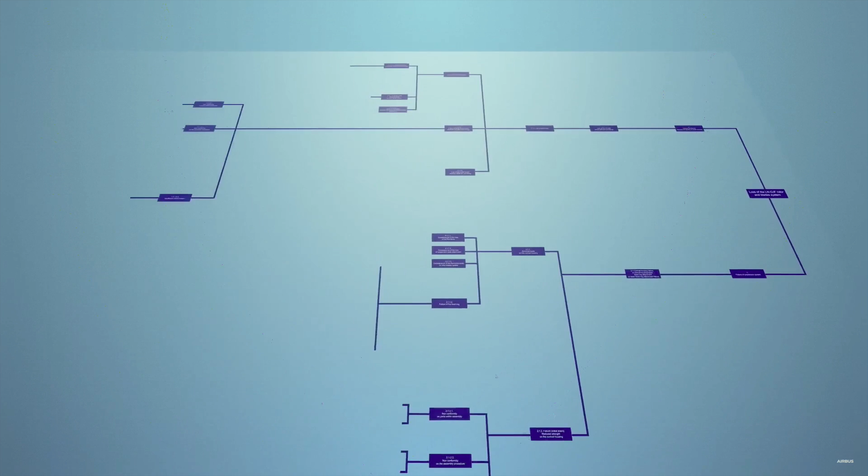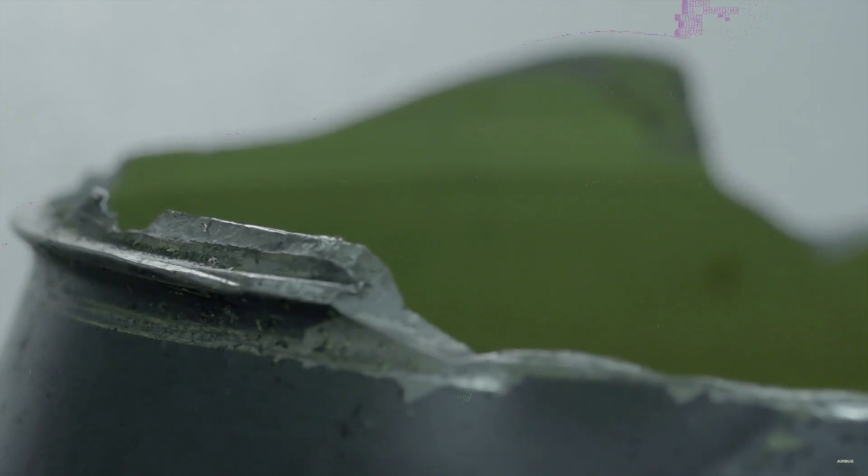Initial observations revealed that the rotor had separated from the cabin. In response, we began by listing all the possible scenarios that could have led to such an outcome, even the most improbable ones. One by one, every branch on the fault tree analysis was put to the test in order to confirm or rule out each hypothesis. We drew on all the information gathered by the investigators on site to piece together exactly what happened. Each and every detail was taken into consideration. We also used complex numerical models simulating different failure modes, comparing them with observations of the actual parts.

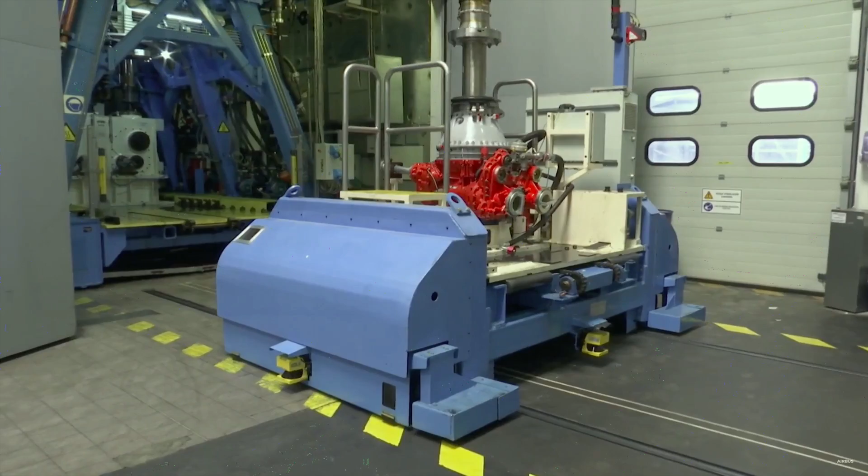In the meantime, we considered and examined a 2009 Super Puma accident that bore similarities. Finally, we carried out about 2,000 hours of testing in dozens of different tests, the aim being to reproduce the failure scenarios envisioned and to identify which one actually occurred. In total, more than 370 people were called upon during the course of a year.

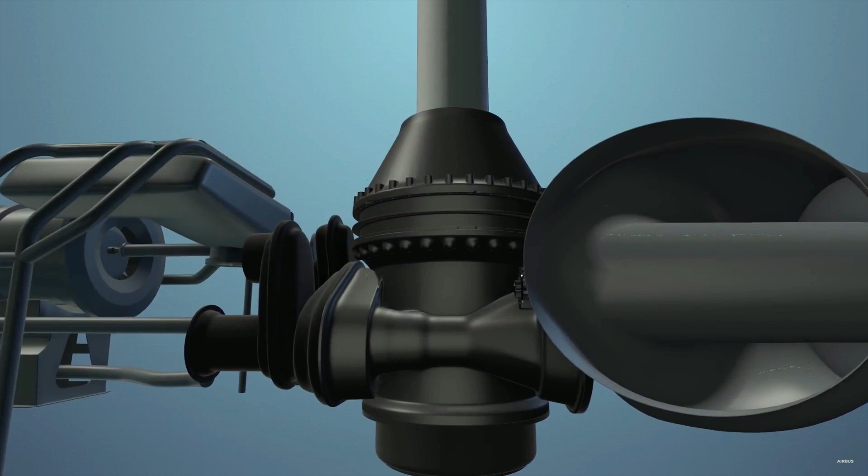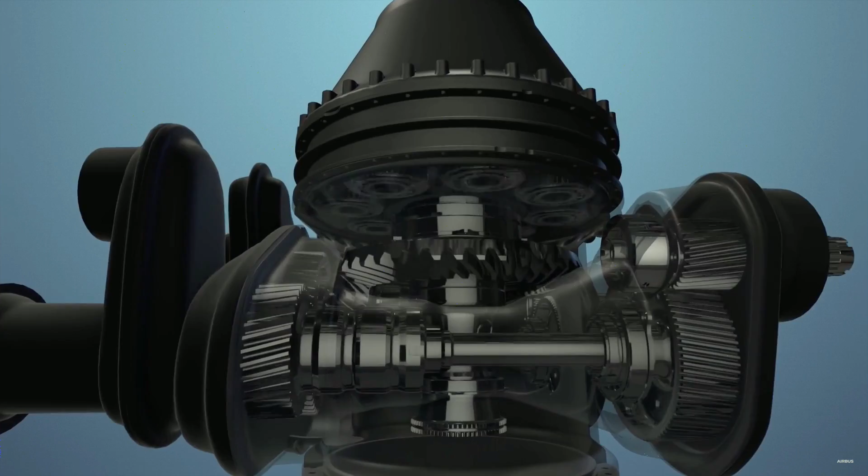Throughout the official investigation led by the Norwegian Accident Investigation Board and supported by Airbus Helicopters, we were able to identify precisely the sequence of events. The origin was traced back to the inside of the main gearbox, a key mechanism in the aircraft, as it transmits power from the engines to the rotors, while reducing rotational speed from 23,000 RPM to 265 RPM for the main rotor. The inside is a series of reduction stages comprising gears manufactured using the finest material and surface treatment technologies and in line with the highest quality standards.

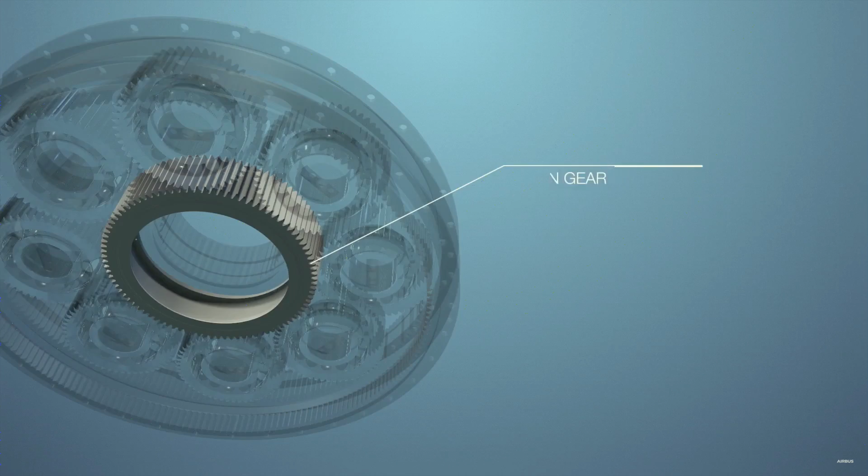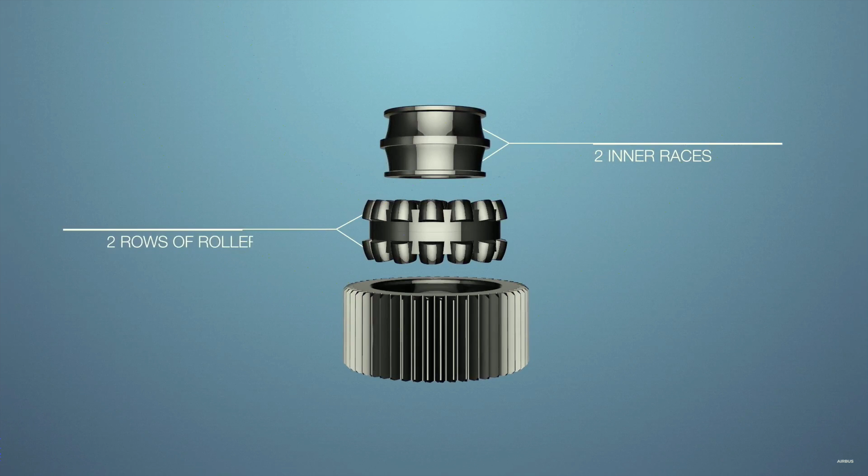The second stage, epicyclic gear train, comprises a sun gear, 8 planet gears, a planet carrier, and a fixed ring. Each planet gear contains 2 inner races, 2 rows of rollers, and 1 outer ring.

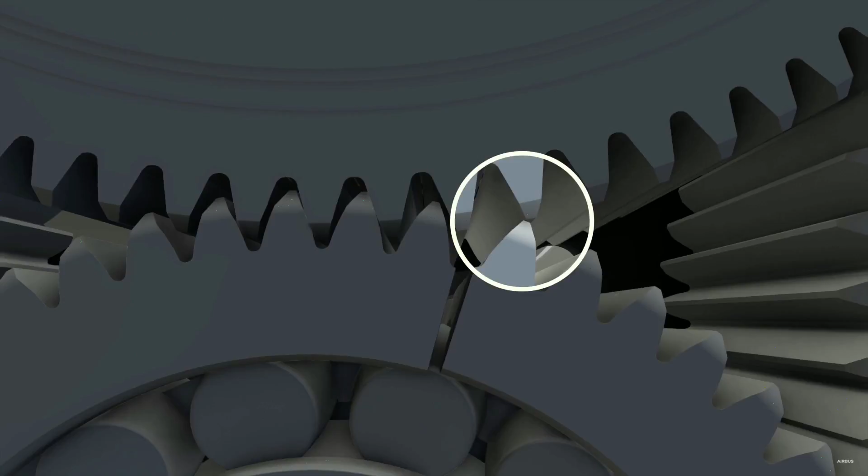It is inside this ring that the failure began, with an initial and very limited spalling. Unexpectedly, this very limited spalling gave way to a crack, which then spread until the planet gear split in two between 2 teeth. The space between these 2 teeth grew, causing a collision with a tooth on the sun gear. The planet gear broke instantly.

Pulled by its own inertia, the main rotor caused the top section of the main gearbox to shear off and separate from the structure.

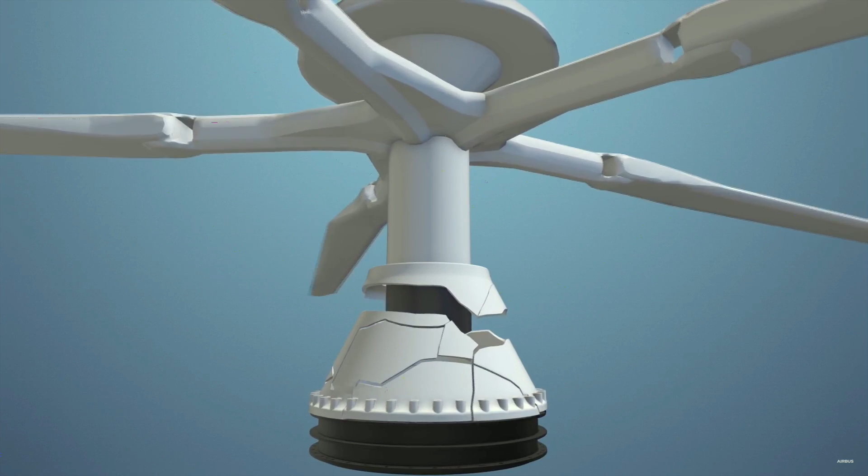Let's go back to the beginning, however. How could such an accident have happened?

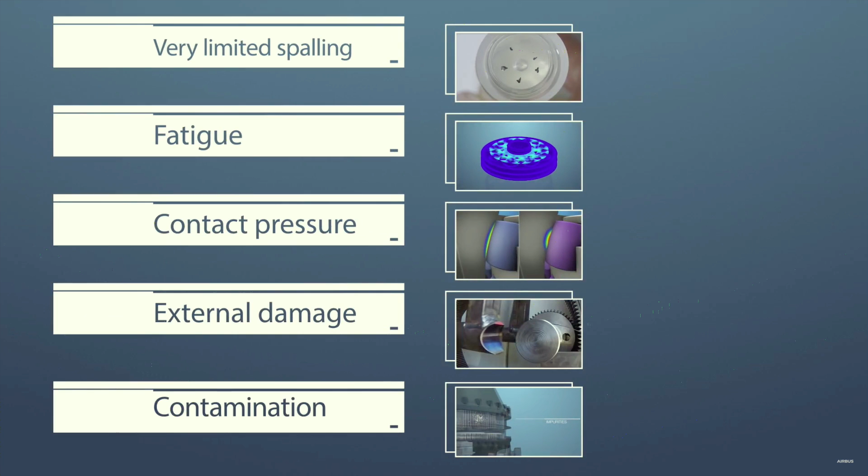The potential contributing factors were identified, and safety barriers were put in place to eliminate their reoccurrence. One of them is the non-detection of very limited spalling. Spalling is a normal degradation of bearings that remains acceptable up to a certain amount. This is monitored with magnetic plugs that collect the metallic particles.

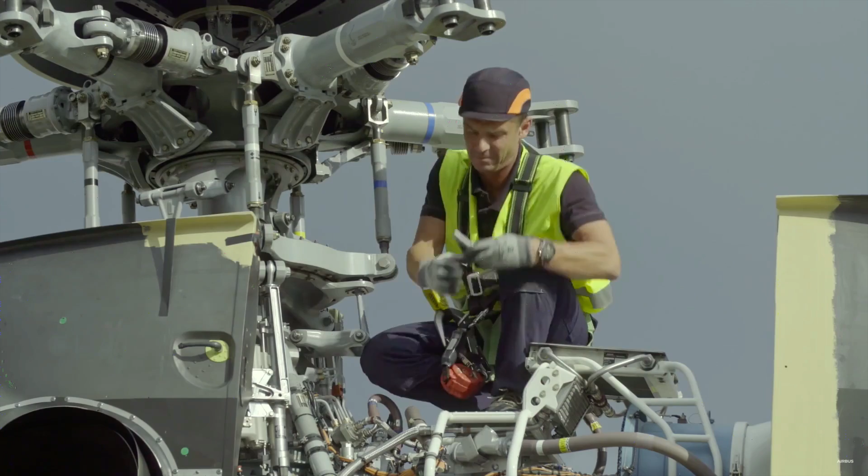In the case of LN-OJF, the defined practice of particle detection was not sufficient to reveal very limited spalling. We have therefore improved this practice of metal particle detection.

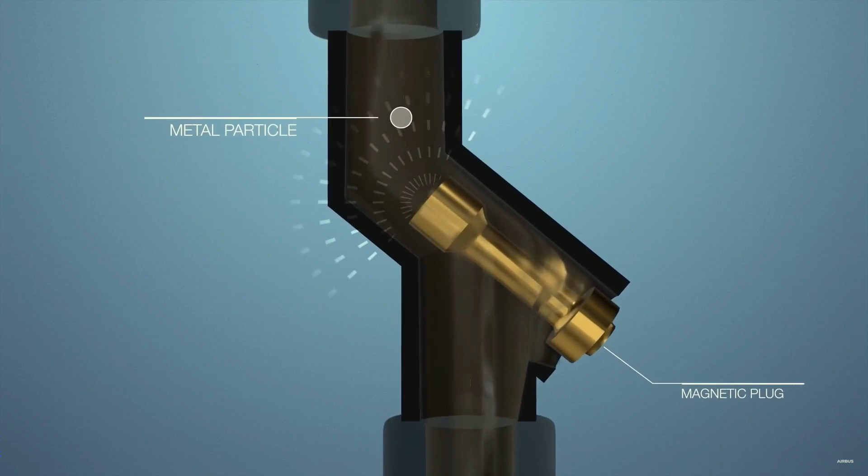The frequency of inspections has been significantly increased. Stricter removal criteria have been put in place regarding particle sizes. Detection methods were completely overhauled and now include the latest generation magnetic plug with increased performance.

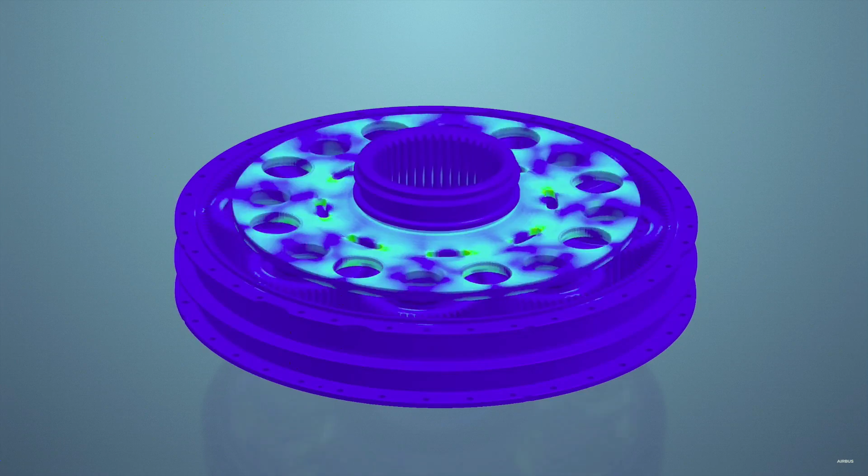Another potential contributing factor is the phenomenon of fatigue. Some metal parts subjected to high repeated stress have a defined number of cycles before their possible failure. Airbus helicopters therefore defines a maximum operating time for each part.

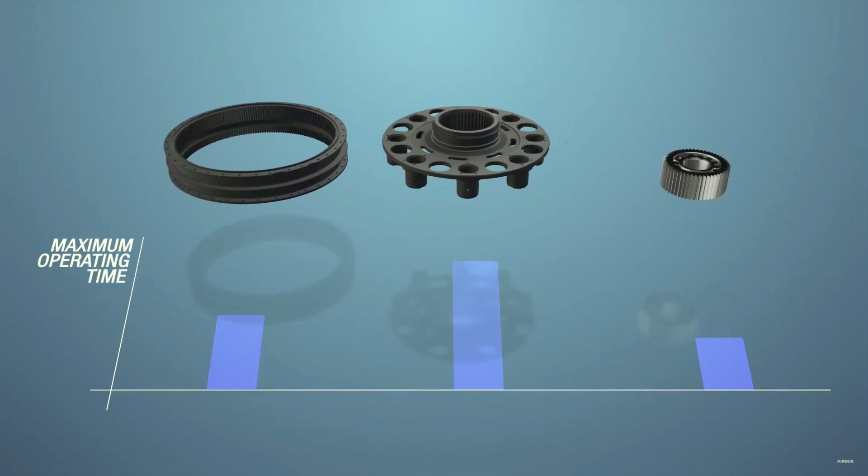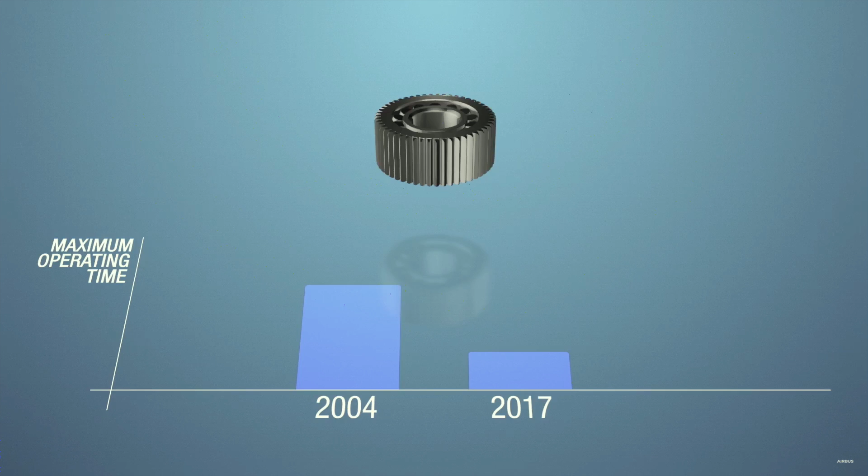In 2004, Airbus helicopters defined a maximum operating time in accordance with the certification requirements. In 2017, based on the learnings from the accident investigation, this maximum operating time has been reduced by a factor of 4. Another potential contributing factor is linked to the design of the planet gear.

2 suppliers manufacture these planet gears, and their designs are not 100% identical, even if both match the technical specifications. The second creates greater contact pressure and was used in the LN-OJF's main gearbox. This planet gear has now been prohibited outright.

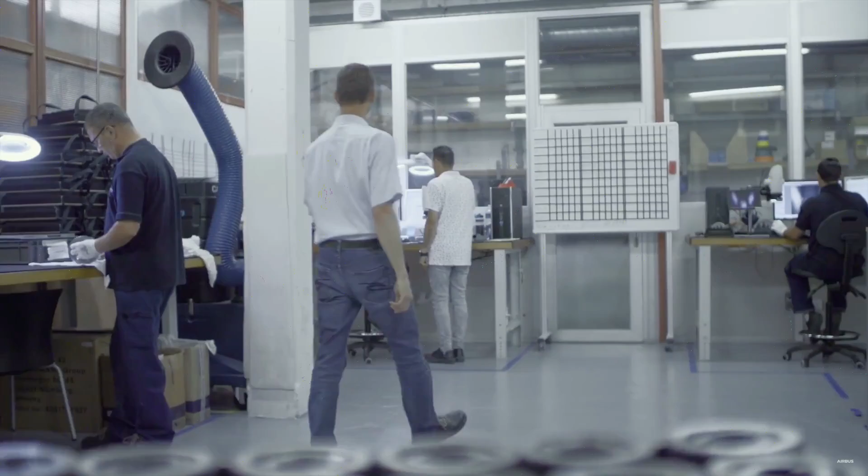Another potential contributing factor is external damage occurring to the main gearbox. Before being fitted onto the helicopter, the main gearbox in question sustained a fall during a road transportation accident.

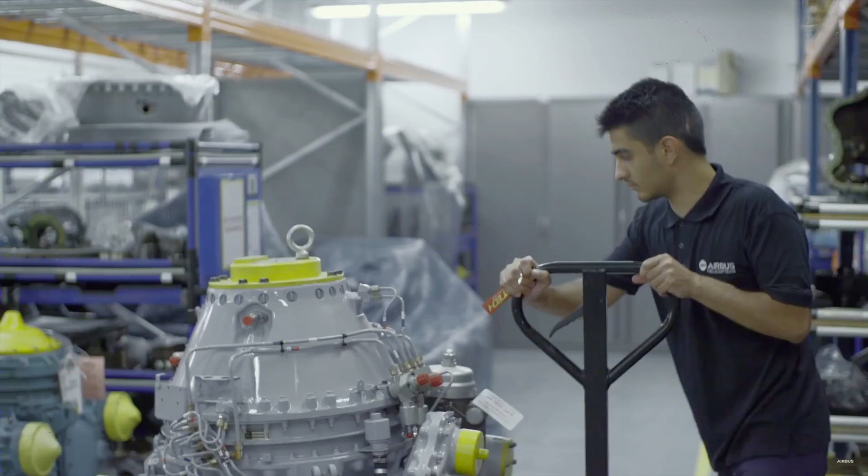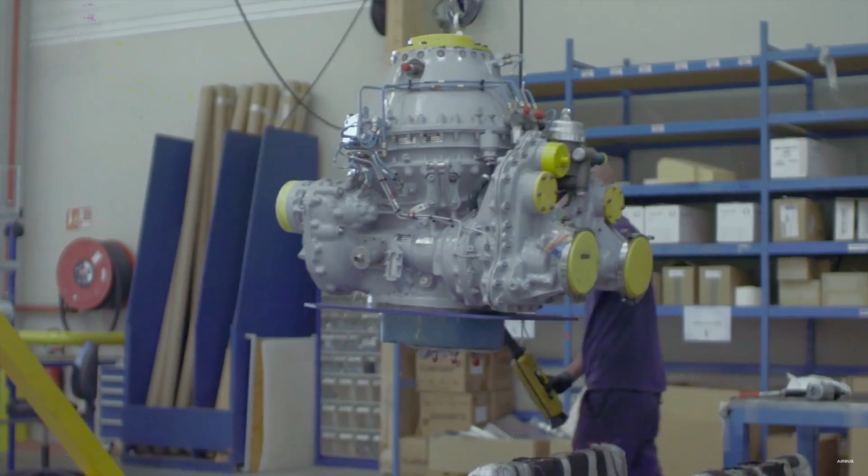It has been decided to withdraw from service any main gearbox having suffered a shock, a lightning strike, a hard landing. In addition, we put in place a series of initiatives to improve the shock resistance of the main gearbox during transportation and to better report back any unexpected event.

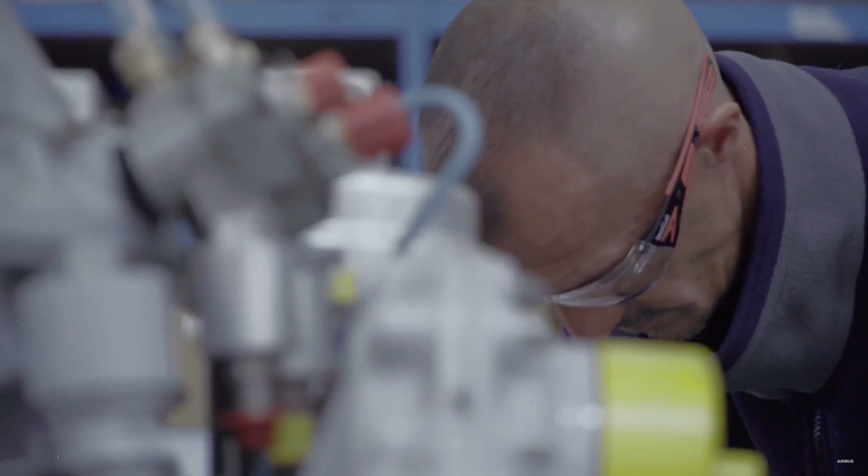Sensors that capture parameters such as temperature, pressure, altitude, lighting, inclination, and shock level have been placed on the main gearbox, and previous history of the part can be closely monitored.

The packaging for the main gearbox now includes highly visible stickers that change color if the crate sustains a certain level of force or shock.

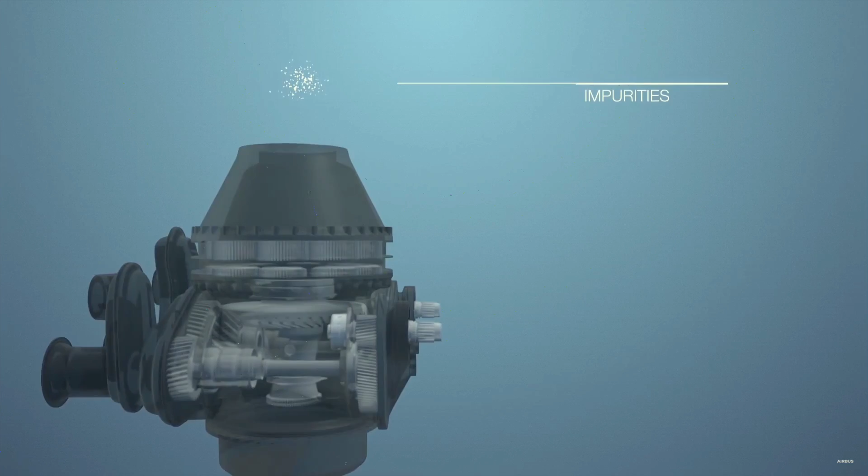The last potential contributing factor is a contamination by impurities finding their way into the main gearbox during maintenance, which then could have created damage in the planet gear leading to spalling.

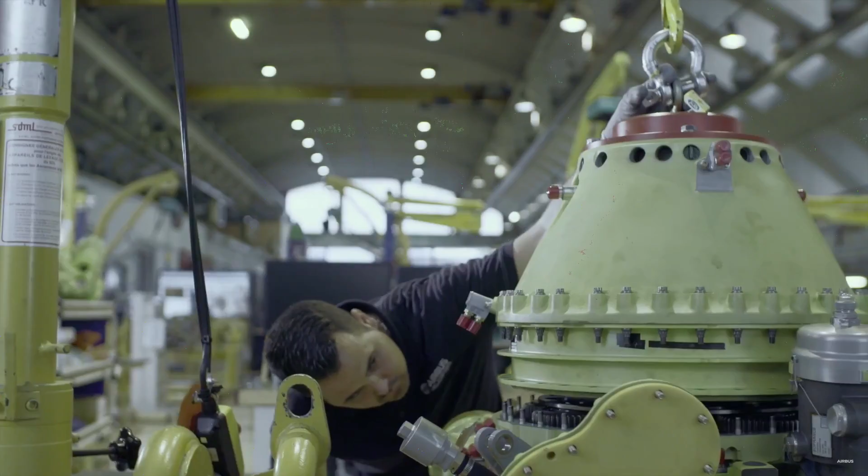Additional measures have been put in place to protect the main gearbox during maintenance operations, and disassembly of main gearbox modules can now only be performed by an Airbus helicopter's certified maintenance or repair centre.

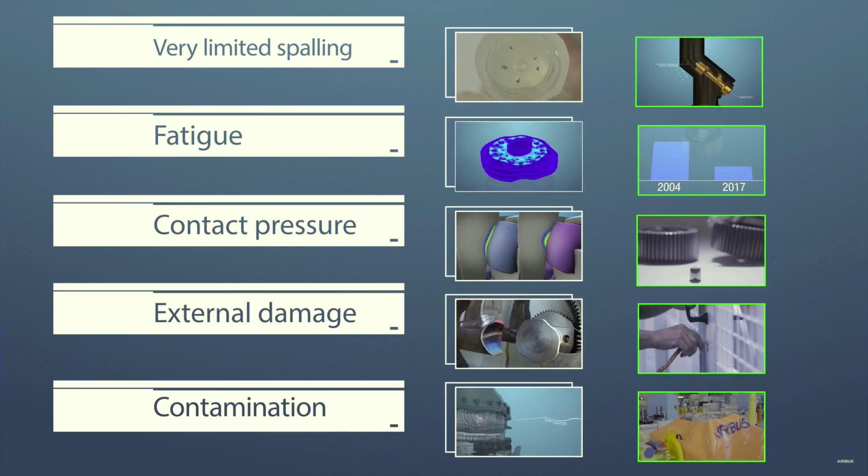The safety barriers put in place are aimed at eliminating the contributing factors to the LN-OJF accident. Based on these measures, the European Aviation Safety Agency and all aviation authorities worldwide have approved the return to service of the H225 and the AS332L2.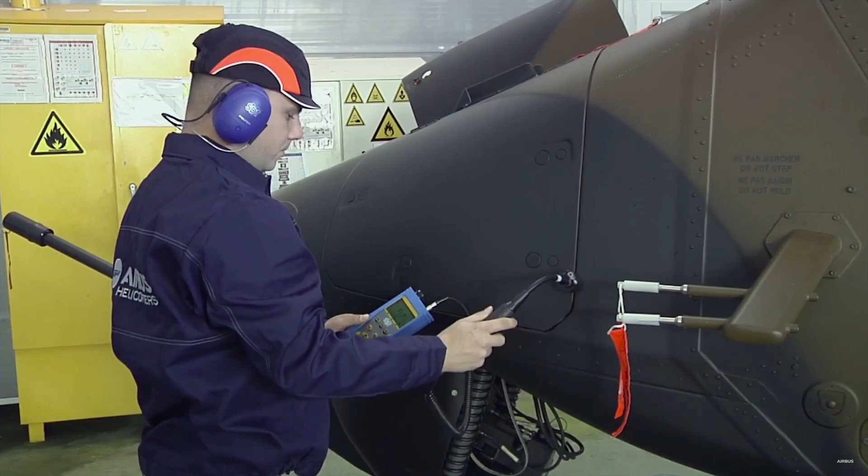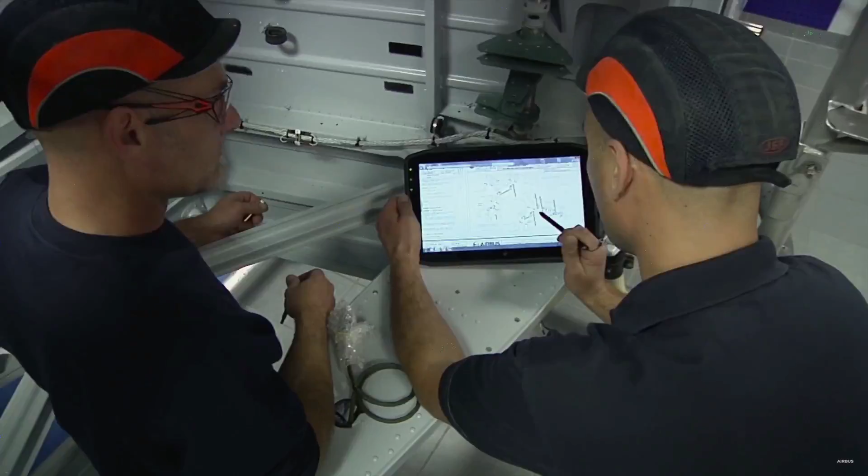Any accident is one too many, and in order to reach our zero accident goal, we are committed to continually improving. The investigation underway led us to thoroughly review and rethink many of our quality and safety processes, not only for the Super Puma, but for all helicopters in the Airbus range.

One example is how we are working on improvements for handling and tracking dynamic components. This includes developing better solutions for documentation, repair feedback, and digital solutions for better traceability.

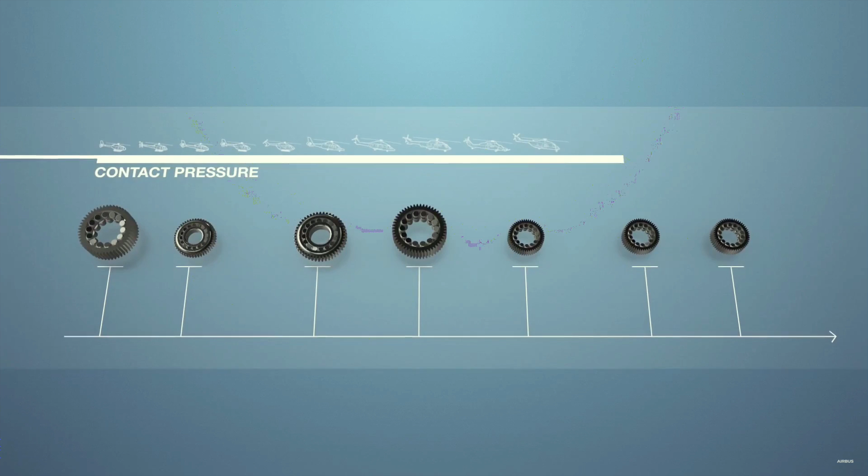Furthermore, taking what we have learned from these investigations, we have gone back and checked the stress analysis for all our aircraft. We took additional steps and applied the same strict standards on planet gear bearing contact pressure to our other helicopters, which led to the removal of 2 types of planet gear as a precautionary measure for the Dauphin family.

Finally, we have launched a research program to innovate how we analyze vibrations. The vibration detection systems on the H225 are used to collect and analyze critical data to optimize the helicopter's availability and safety.

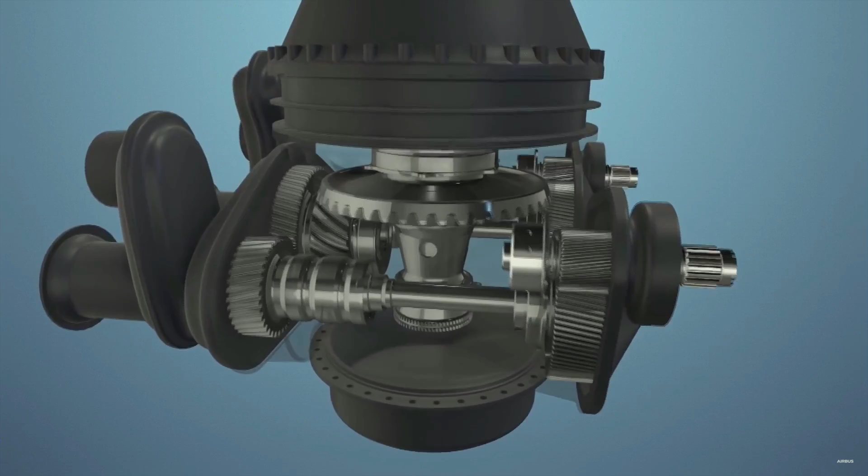We are working in partnership with leading university research centres on the detection of occurrences such as spalling and cracks. We already use vibration as a way to detect damage in fixed gears, but applying these methods to moving gears, such as epicyclic gear trains, does not exist yet. It requires new sensing technologies and complex signal processing methods. We are seeing some promising developments in this field.

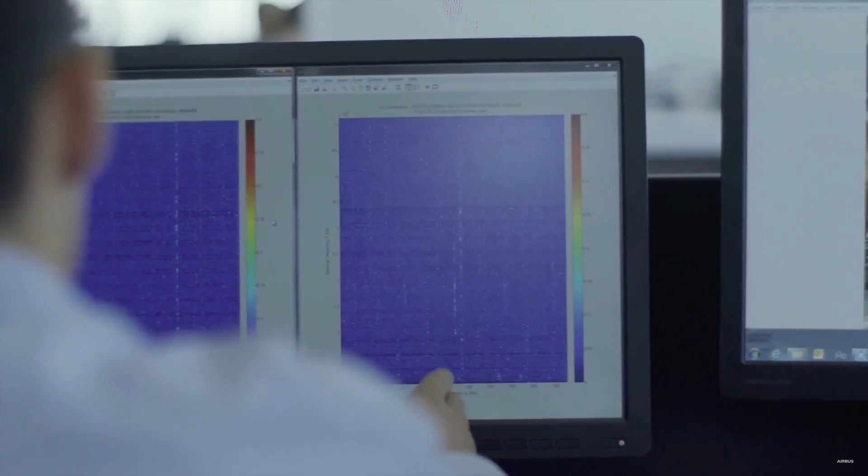All this leads to improve our safety culture. To you who fly in our helicopters every day to complete your missions, and to you, our employees who test each helicopter before it's delivered, your lives are invaluable. We are doing every day everything in our power to learn from this experience and to ensure that the Super Puma is flying with an increased level of safety. Just as we rely on your continued faith, you can rely on our unbending commitment to safety.

We do that, we've already started. This is a screenshot of our phase 1, where we're collecting summary reports from our operators, and we're feeding that into the system. But at the moment, it's based on what people choose to report, because we're getting the industry used to reporting. An industry that's not really reported collaboratively before into a system that they don't own. So as a result of that, we're getting some great results from it, but the problem is we can't trend it, because we've got no rates, and it's what people choose to report.

So we're moving beyond that. So how are we going to get there? What's our strategy? Well, a key to our strategy is collaboration. As we talked about, Patrick talked about, collaboration equals frontline results. And what we've done to build our data program is we've teamed up with General Electric, Tonic, and NLR to help us. And we effectively have a team of professionals sitting around the table now that have done this before in multiple walks of life, both in fixed wing and other industries.

So we're not reinventing the wheel. We don't want to reinvent the wheel. We want to learn from how other industries have done it.

What's going to drive us? How do we know a starting point? Where are we going to go from here?

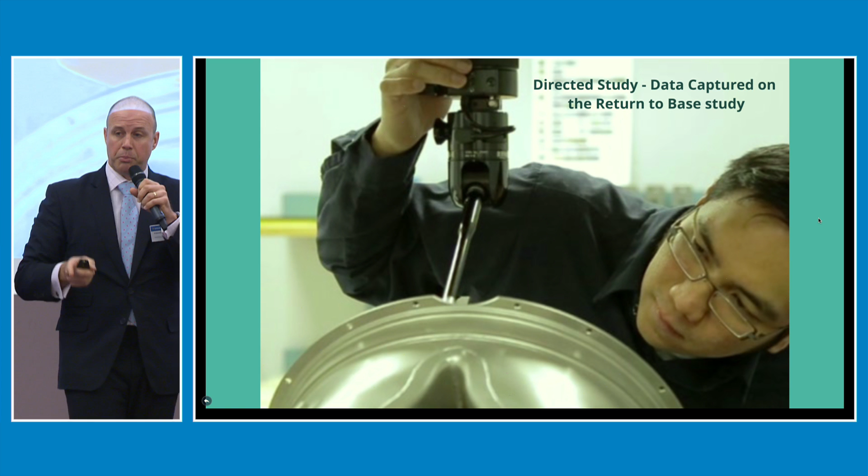So if you get airborne from the airfield and you're flying out to an oil installation and you have a problem, the pilot decides to return to base. And all of those are logged and recorded with the operators. We've collected about 6,000 events. So what we're going to do is, because we already have that data, it's less contentious data, and it's good information for us to put into the system to demonstrate the proof of concept. We're starting with that.

All the operators sitting in the program are going to go back and interrogate their FDM data based on this criteria, not their own triggers. Remember, they're all completely different. They're just going to focus on this, and we're going to pull that data into the FDM data program to see if we can actually get some decent results out of that. But we just want to do the early success in this area.

And then ongoing performance monitoring. How well do we know we're doing? Are we collecting rates? What is our accident rate? Are we collecting cycles? Are we collecting hours? The answer is no. So if we can do that, now we've got something to measure against tangibly. So that's the third key area we're focusing on.

And that's what Patrick Key said effectively earlier. That's what I'm saying now. And so we are making sure that we're completely aligned with everybody that is doing this. So the Data for Safety program, a massive thing. Everybody goes, oh, well, you're doing that, and EASA's doing that. It's not the same thing. It's completely different.

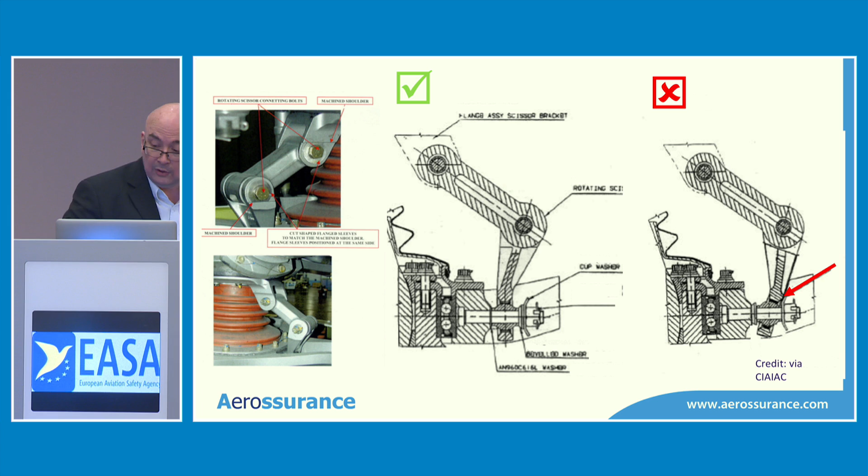So the engineers who did this task had the maintenance data. I challenge you to interpret that data correctly in terms of working out which way round to put this particular lower component. The two red circles - that lower component is not completely distinct, arguably.

I've marked up two of the washers, those shaped washers in red on the right-hand side. Again, it's difficult to specifically see that those are the shaped washers. So that's not a great clue.

There's a couple of part numbers marked in yellow. Turns out when this particular document was examined, there was a couple of transcription errors in part numbers against IPC numbers. Not relevant, but another challenge for the engineers.

The only really pertinent thing that jumps out if you know the layout is where the nuts and the split pins are, and they're both on the left-hand side. I, however, have given you the advantage of putting them in big green rings.

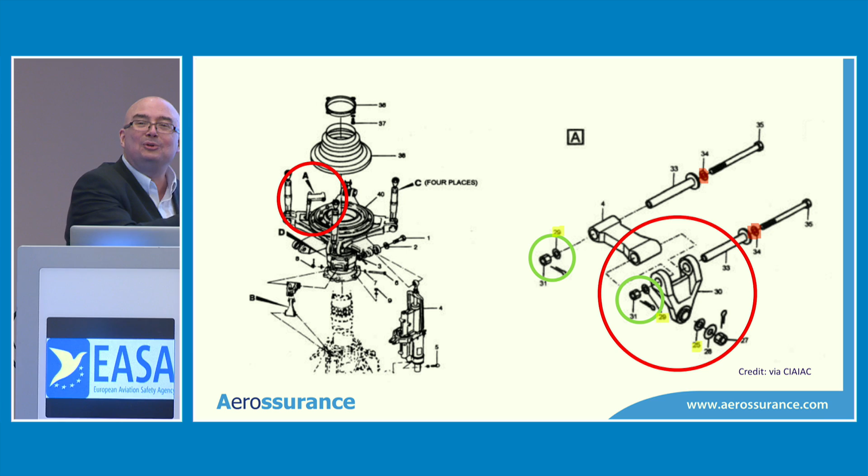So, in this particular maintenance task, was the maintenance manual clear? Well, I've given it 1 out of 3 on this one.

Unfortunately, that lower component could be reversed on the later model of this particular helicopter type. Interestingly, the A model didn't suffer this problem. Slightly different design, that link could only go in physically one way because it was offset slightly.

Interestingly, the engineers, when they had the type training, implied that the main rotor had not been changed when going from the early model to the later model. So they were sort of set up with the assumption they would be doing a task they were familiar with.

There was also another visual clue that may have caused confusion. The earlier model had the part number embossed on the outside of the casting. The later model had it embossed on the other side. So if you were using that as a learned visual clue, it would encourage you to reverse the component.

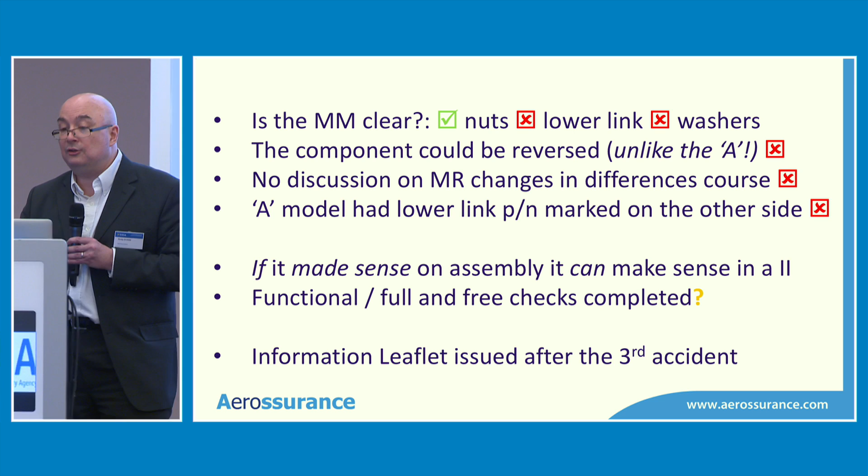Now, of course, independent inspections should pick these things up. But in terms of confirmation bias, if you're expecting something to generally be right most of the time, it's very easy, if it makes sense to the first person to do the inspection, for it to make sense to the second person. And of course, they'd never done this task before on this new model of helicopter.

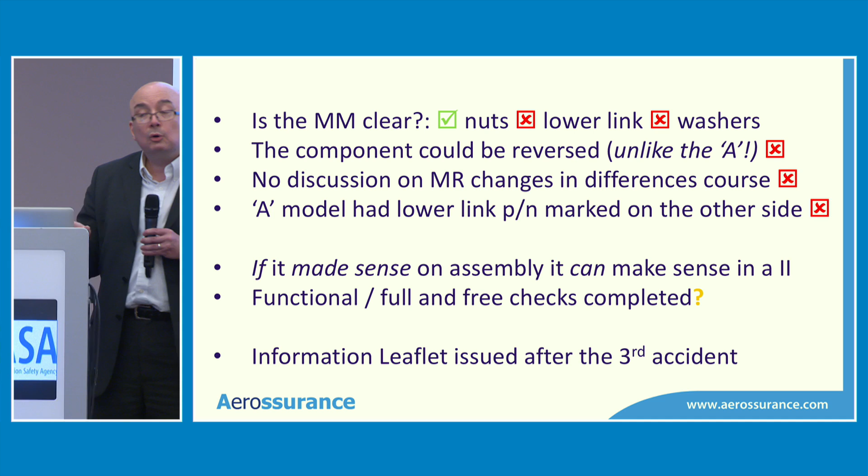The 3 accident reports are a little bit vague on whether any kind of full and free functional test had been done. Maybe that would have picked up the contact with the cup washer, maybe not. The last line is just a quick note that after the 3rd occurrence - and to be honest, it was only after the 3rd occurrence - that all the information was pieced together. The manufacturer issued an information leaflet and highlighted this particular challenge.

Now, I mentioned 1964 before. Now, that was before I was born, perhaps surprisingly, don't laugh. Probably before anyone in this room started their aviation career. I'm pretty confident on that.

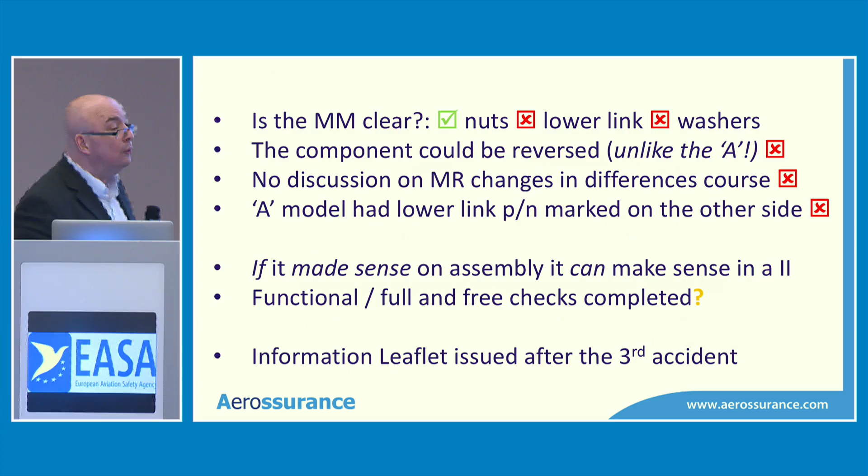But 1964 is an important year because 1964 is the year that the cert requirements that are relevant to this type of component were written. And for Part 27 and Part 29, they have not changed since 1964. Now, you might think that's because it's an excellent and mature and perfect rule, but perhaps we should look at the words first before we jump to any conclusions.

Now, actually, the words are quite good - well, some of them. It talks about designing to minimize the probability of any incorrect assembly. That's pretty good. But then in purple...

Also in yellow, it says, but if you can't design it that way, you can mark it. In the AC material, again, it does say, plus point, the preferred method is to make it impossible to misassemble. But then it says, in the event that incorrect assembly is physically possible, because of other considerations, you can use some markings.

I'd be fascinated to see what people think other considerations might be. I assume it doesn't mean, it's Friday afternoon, long weekend coming up, that's good enough, we'll just leave it as it is and slap a label on. It's a slightly odd bit of advisory circular material.

So we're working with quite an old rule, which is more flexible than it first appears to be. And in practice, there is evidence, there's some other events that I'm not going to discuss today, where actually when you look at it, after a misassembly, even the labelling hasn't appeared. So it does question how some of the compliance has been found in the past.

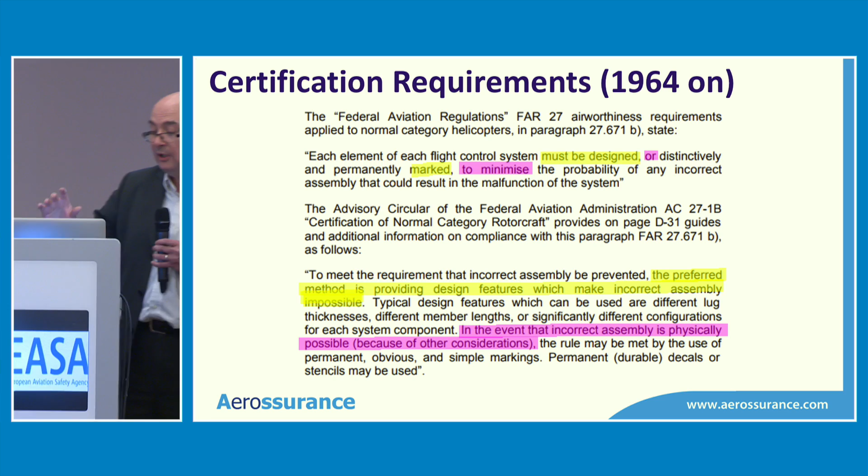Now I'm going to look at another example which does involve an accident, but I'm merely using this as an illustration. I'm not commenting on the accident itself. Firstly, I'm just going to give you a quick orientation to some controls. There's a big rod that goes that way, backwards and forwards.

It turns a little L piece that rocks. That then moves another linkage up and down. Brilliant flying control stuff, really exciting.

What I'm going to talk about in this example is the potential of variability in assembly. So it's not a square peg in a round hole type misassembly, but other variations in maintenance and assembly, as well as how inspectable things are.

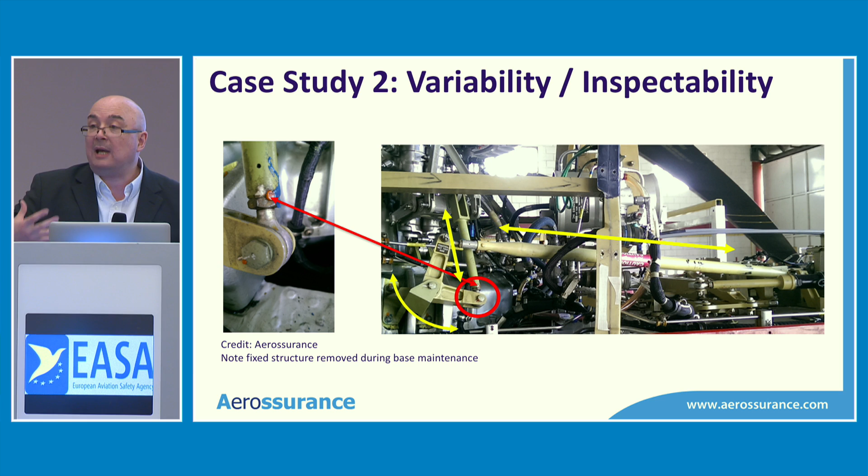So this particular photo is taken from an accident report, and as I say, I'm merely using it to illustrate the configuration. Now, the good news on this one, you have got a little label on that particular nut to say, put it this way round. So labelling is going on.

Now, this particular assembly, according to accident investigators, this is how it was found. So you've got an item, a fork end pinned at this end. You've got an eye end with a thread, which is pinned at that end, and the thread that goes in the tube is found outside. We have no more information on that in the public domain, but that's not really my interest.

Now, what you've got in this assembly is a jam nut, a little nut there. Now, tightening that puts some preload on the whole assembly. That stops it vibrating. Good thing.

At the time, originally, the instructions for doing this assembly talked about finger tightening, then tightening 1/6 to 1/3 of a turn. So there's some variability in the assembly between what I think is finger tight and roughly what I think is in that range of movement, and what someone else might do, or even what I myself might do on a different time at a different date. So there's some potential for variance.

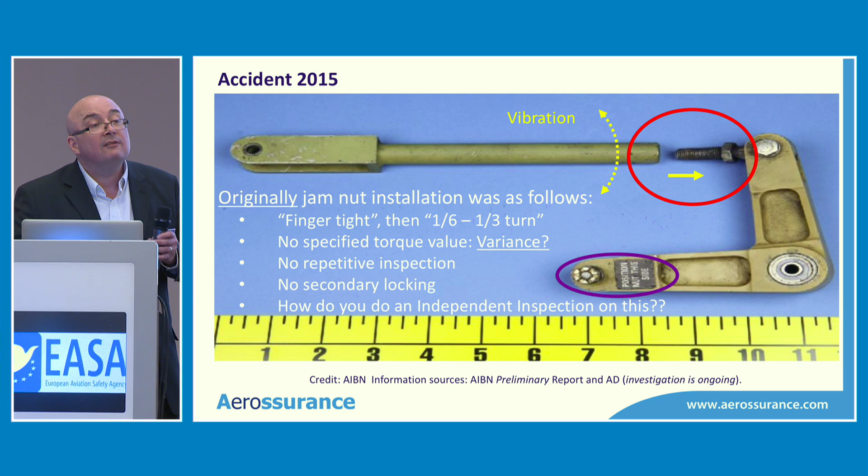Now, I would argue the certification requirements have a sort of loophole. They're focused only on an orientation, not adjustment. It appears the approach to compliance may be a little bit variable, not necessarily between manufacturers, just between different components across aircraft.

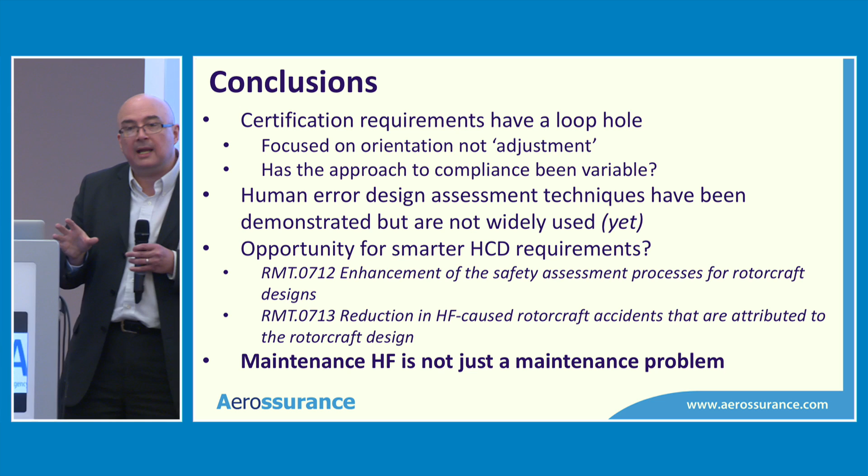Now, there have been a number of techniques demonstrated in the past looking at assessing the risk of misassembly errors. So a number of techniques have been used. For example, Sherpa is a technique that was popular and is popular in the nuclear and rail industry. That's been tried on helicopter components at least 17 or 18 years ago, quite successfully.

Some other organisations on the stage are working on research at the moment on human-centred design and human reliability risk assessment type processes, which have good potential to help look at these types of assemblies and identify the possible ways they can fail and help improve designs.

In terms of rulemaking, there are two rulemaking tasks on the EASA inventory, both of which could, if the agency was minded, start to look at this particular area.

712 is looking at safety assessment processes for rotorcraft. That one's particularly interesting because in the previous RMT looking at aeroplanes, they did actually have a look at the fixed wing equivalent of that flying controls rule and made some improvements to it in an NPA. I'd argue that with the risk of misassembly in rotorcraft, it would be even higher because of the larger number of components that could be critical. Perhaps we have the opportunity in rotorcraft to do something a little bit more advanced and maybe be ahead of the fixed wing community on this.

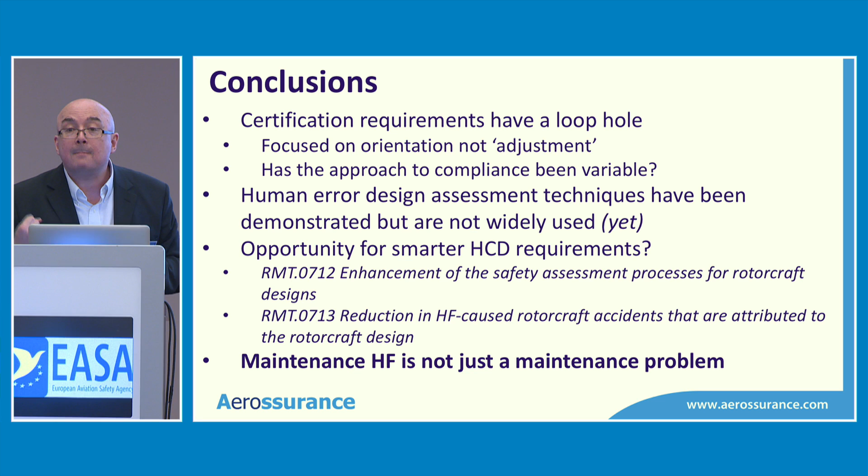My final comment is, just remember that maintenance human factors is not just a maintenance problem. That's all I have to say. Thank you very much.